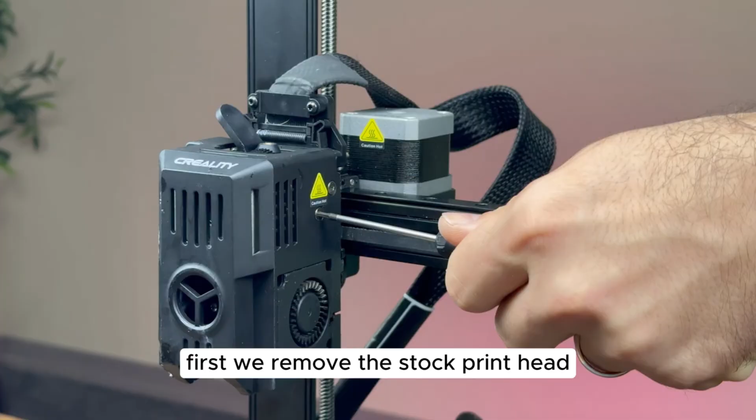Today, we are upgrading the Creality Ender 3 V3 KE with the KCM set to enable multicolor printing. First, we remove the stock print head. Let's unscrew the front cover, disconnect the fan cable, and take off the cover.

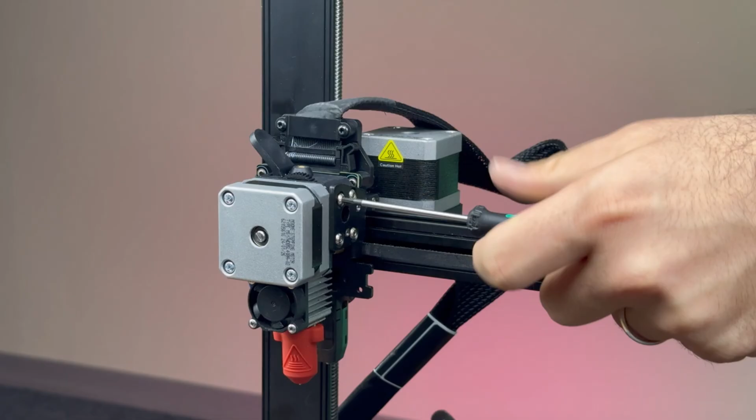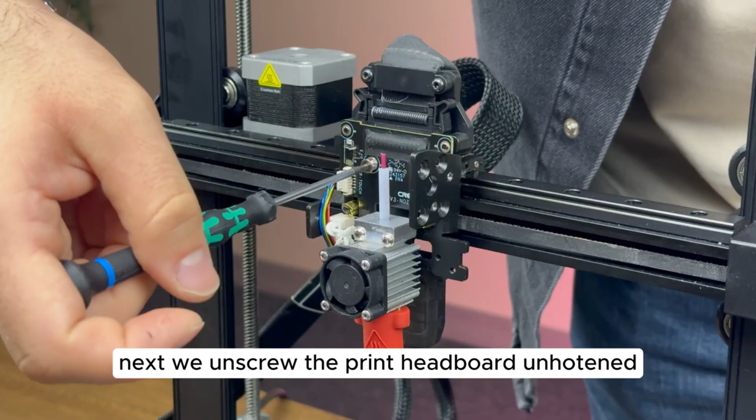Now, we remove the screws of the extruder motor. Next, we unscrew the print head board and hot end. Disconnect the hotend cables and take out the hotend.

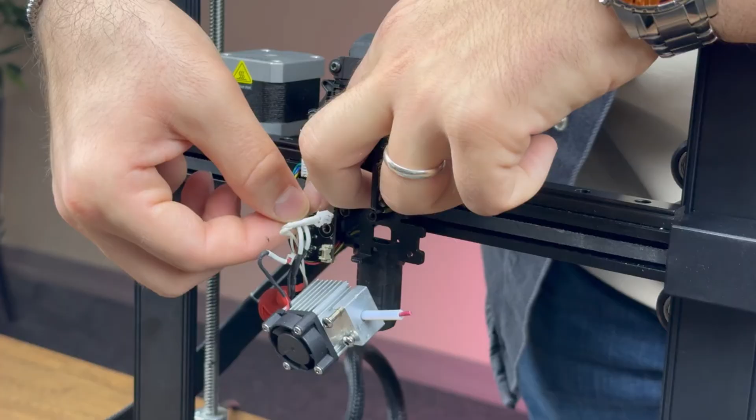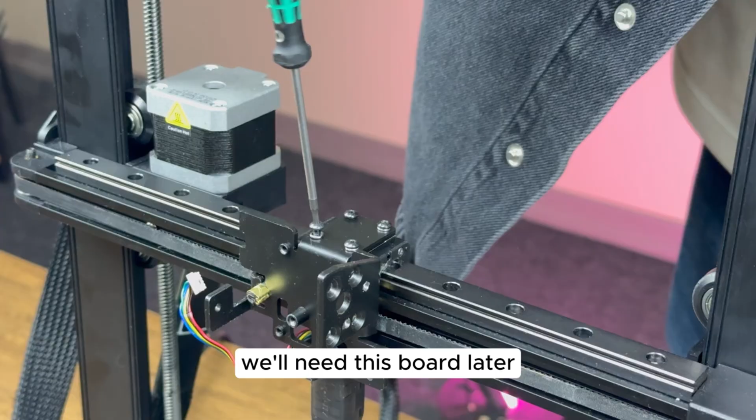We unplug the bed leveling sensor cable and move the print head board aside. We'll need this board later. Now, we remove the metal bracket holding the stock print head by unscrewing it. To detach the belts, we loosen them, then remove the last screw and take out the metal bracket.

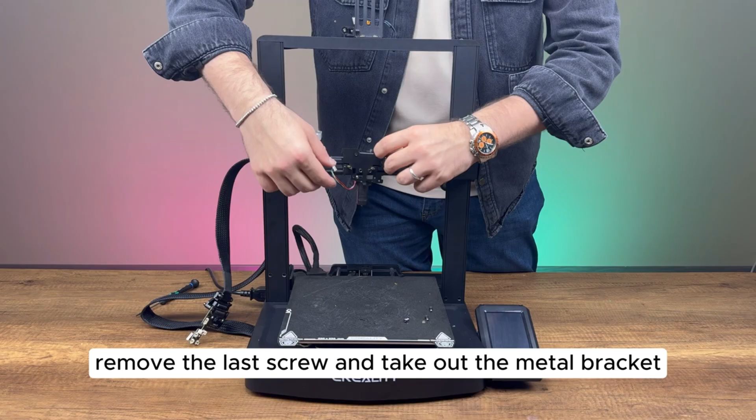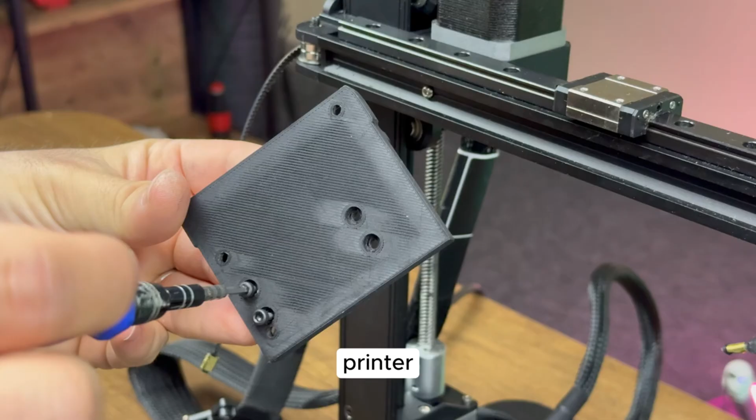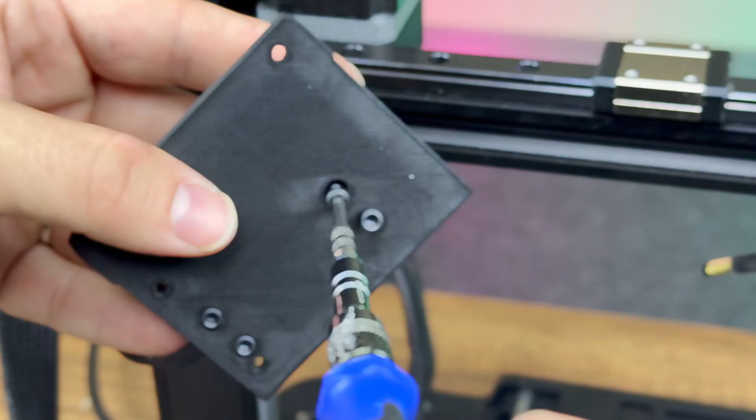We install the custom mounting part designed for the Chroma head on the KE printer. First, we tighten the screws for the belt attachment part, place the belts, and secure the screws. We repeat this process on the other side.

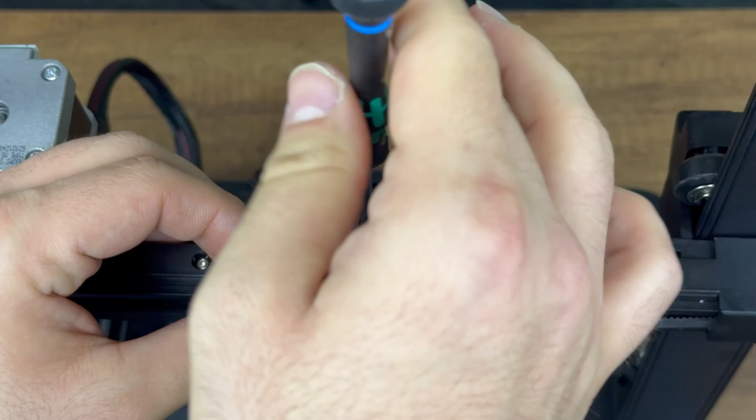Now, we secure the mounting part onto the MGN rail by tightening the screws. Let's retighten the belts.

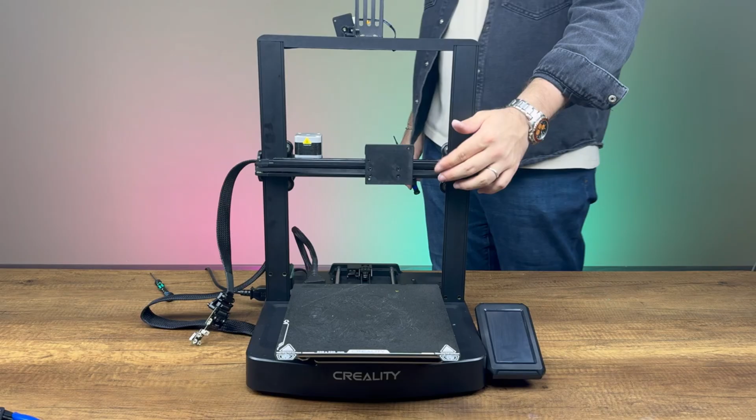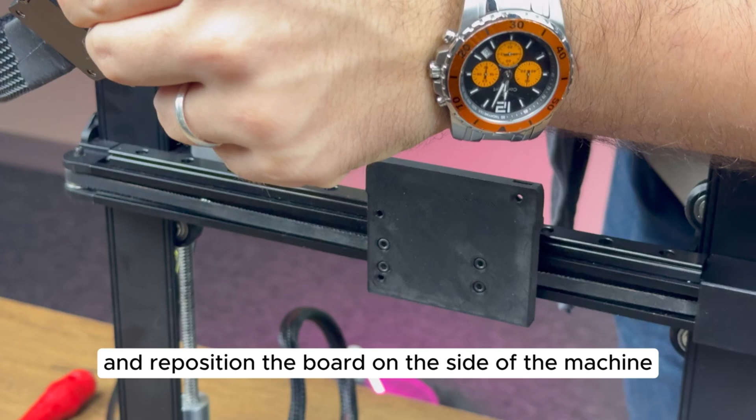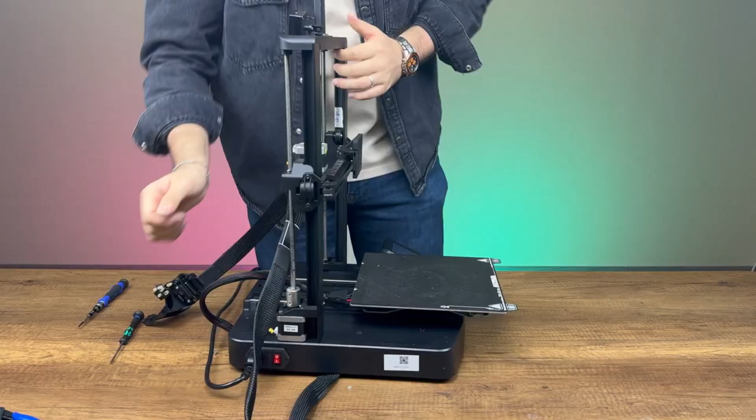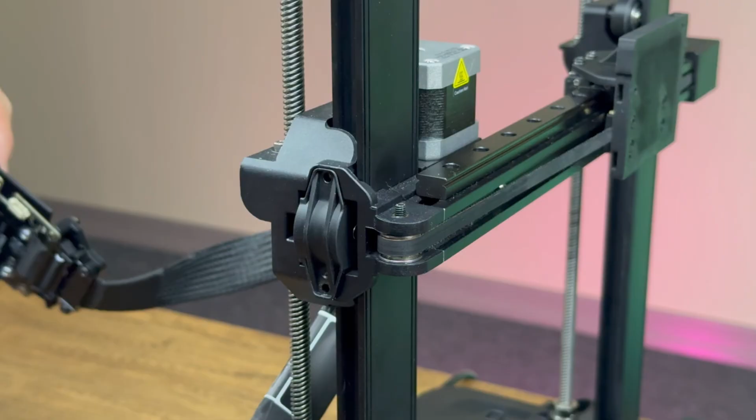Since the X-axis sensor is located on the print head board, we need to attach it to the custom mounting part and reposition the board on the side of the machine. We remove the screws from the side and install the mounting bracket before securing the screws.

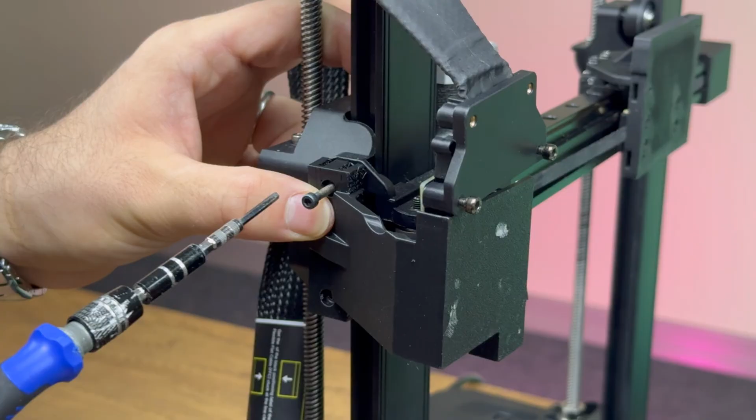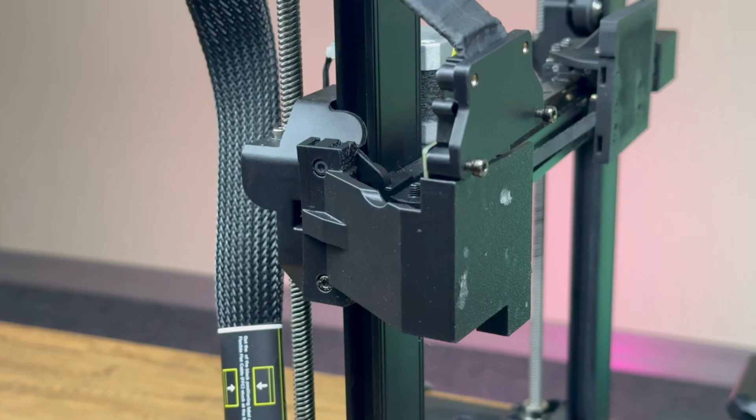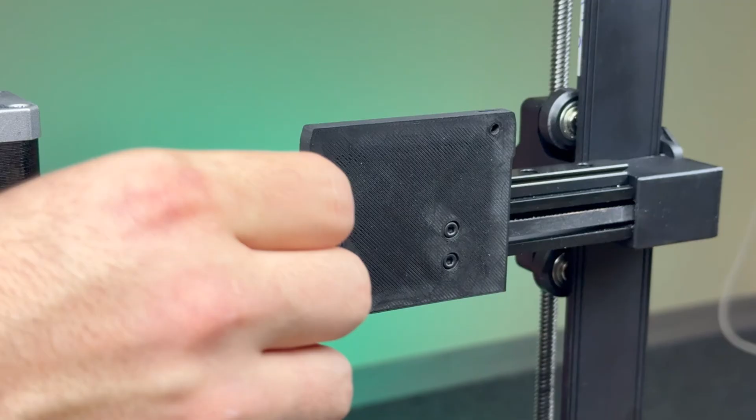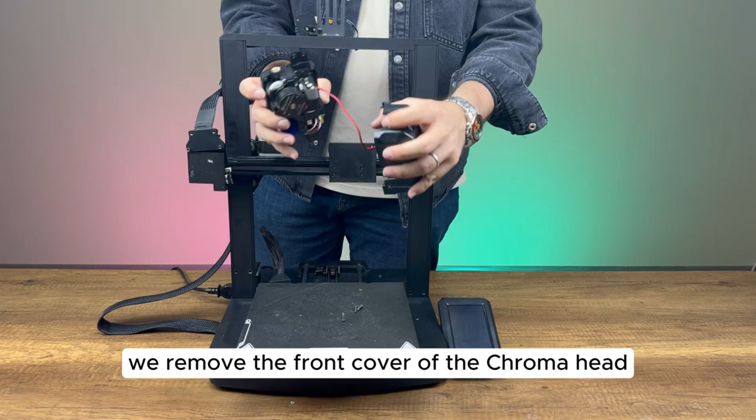Now, we insert the square nuts into the mounting slots to install the Chroma head. We remove the front cover of the Chroma head and disconnect the fan cable. We secure the Chroma head by tightening its screws.

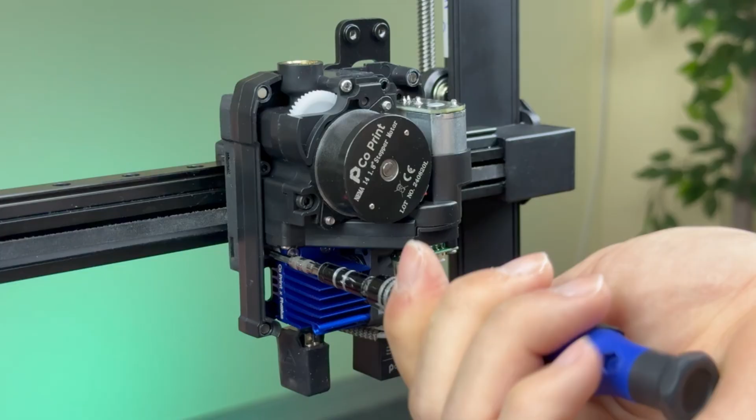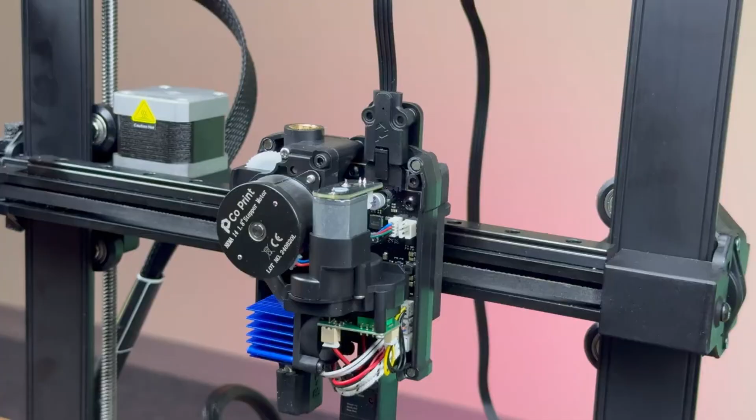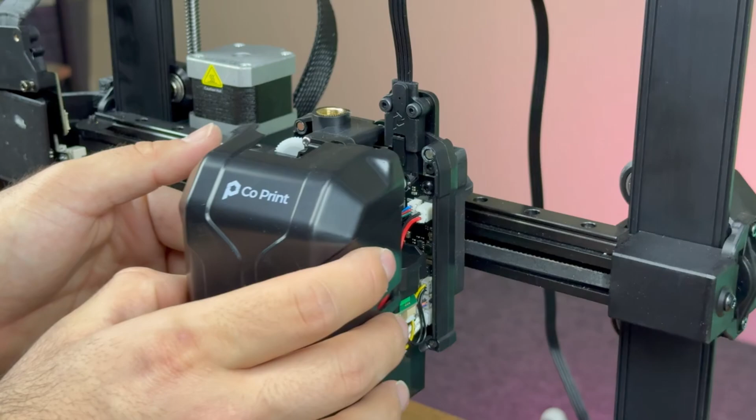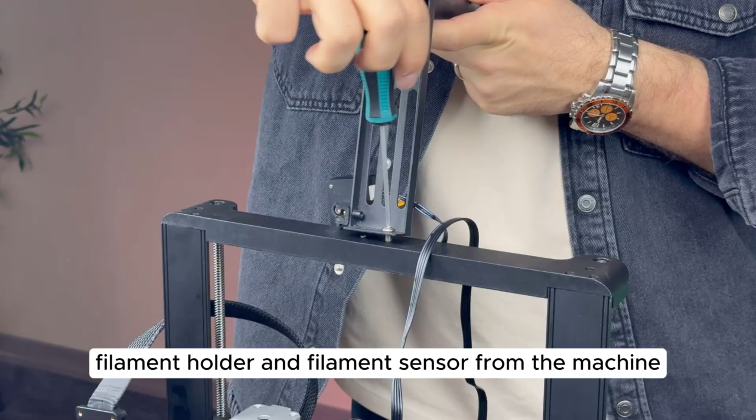Now, we connect the print head cable and secure it with screws. Next, we reconnect the fan cable, close the front cover, and install the 8-in-1 module onto the print head. Let's remove the stock filament holder and filament sensor from the machine. We mount the extruder block holder, tighten its screws, and secure it to the printer using the pre-drilled mounting holes.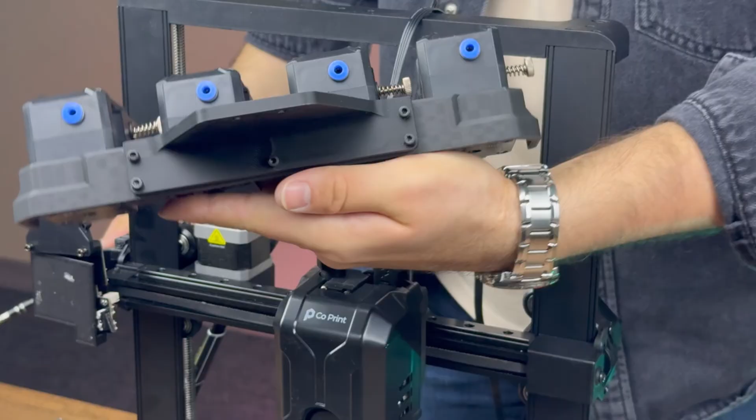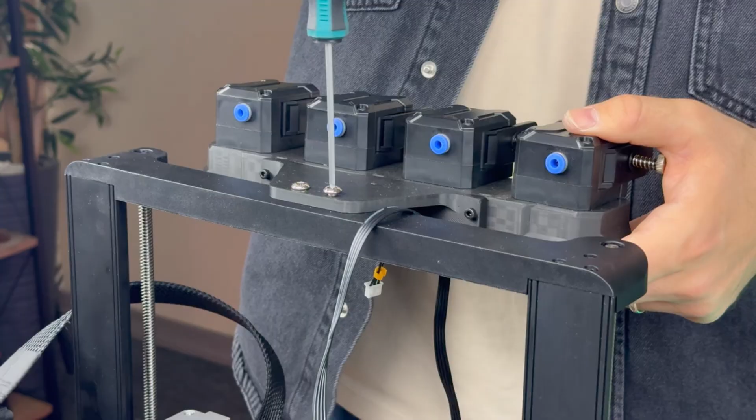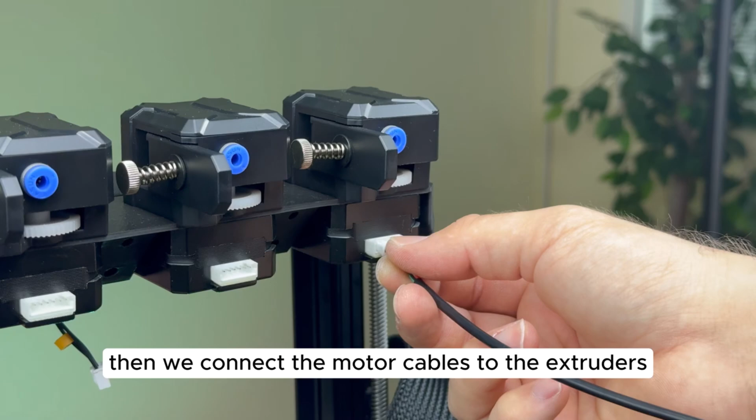If the printer's power cable is connected, we unplug it. Then, we connect the motor cables to the extruders. Next, we connect the motor cables to the KCM. Then, we connect the USB Type-C cable to the KCM.

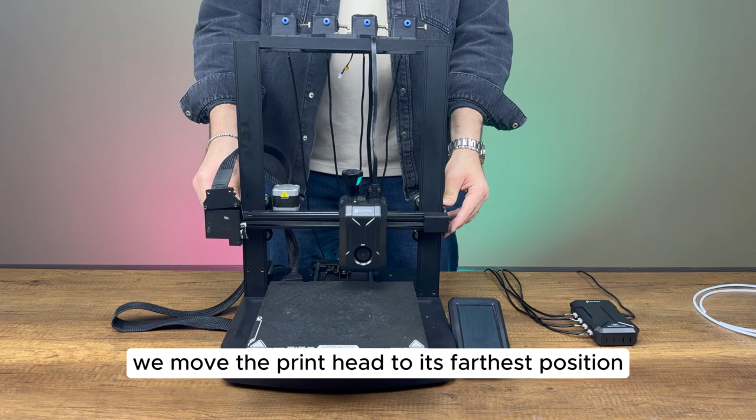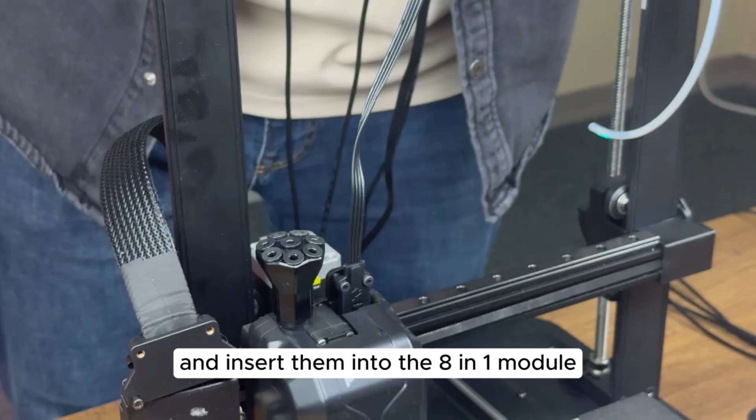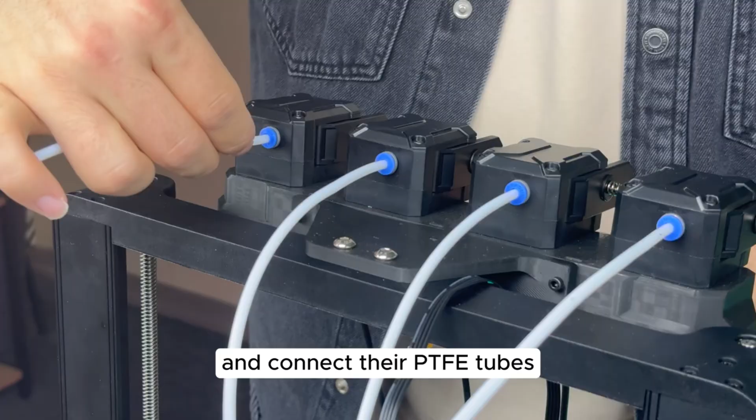To install the PTFE tubes, we move the print head to its farthest position. Cut the PTFE tubes to the appropriate length and insert them into the 8-in-1 module. For the remaining 2 extruders, we move the print head to the farthest position again and connect their PTFE tubes. Now, we bundle the print head cable and PTFE tubes together.

Let's plug in the printer's power cable and turn it on. Next, we connect the USB hub to the printer. Now, we open a browser and enter the printer's IP address, adding :4409 to access the Mainsail interface. In the machine section, we delete the printer.cfg file. Before deleting, you may back it up. Then, we upload the new configuration files, which can be downloaded from GitHub.

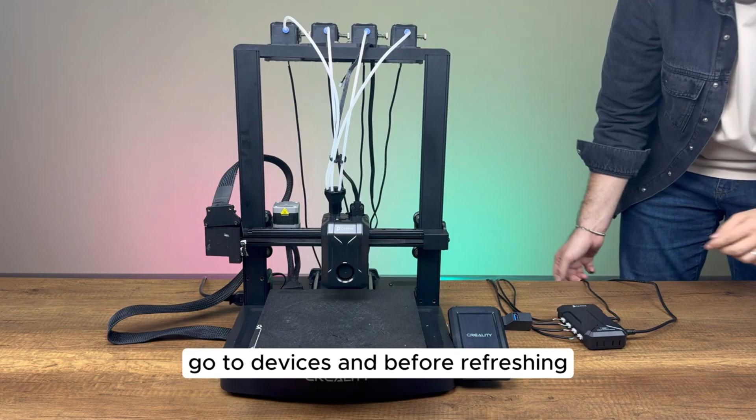Now, we open the kcm.cfg file, go to Devices, and before refreshing, we connect the KCM to the printer. After refreshing, we copy the new serial path and paste it into the serial section. Then click Save and Restart. Next, we open the chroma head.cfg file. Go to Devices. After refreshing, we copy the new serial path, paste it into the serial section, and click Save and Restart. Now, we can access the dashboard.

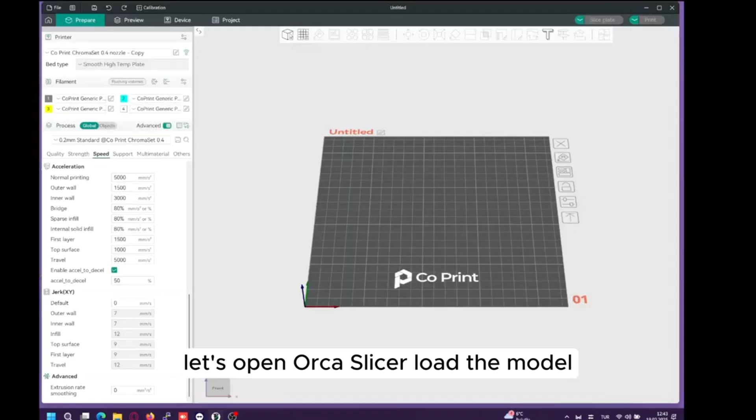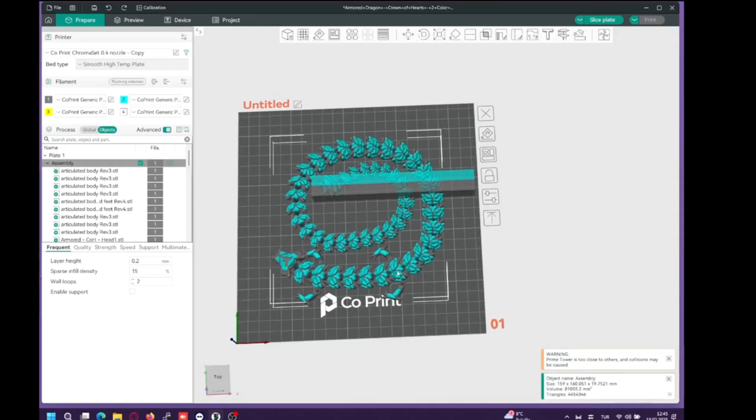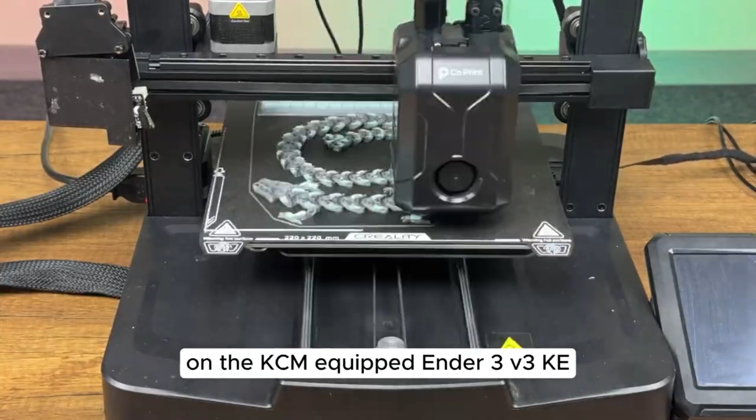Let's open Orca Slicer, load the model, enter the bed dimensions, scale the model, and apply colors. We enter the printer's IP address into Orca Slicer, set the color change ratio, slice the model, and send it to the printer. Now we start the print. This print took 10 hours and 3 minutes on the KCM-equipped Ender 3 V3 KE.